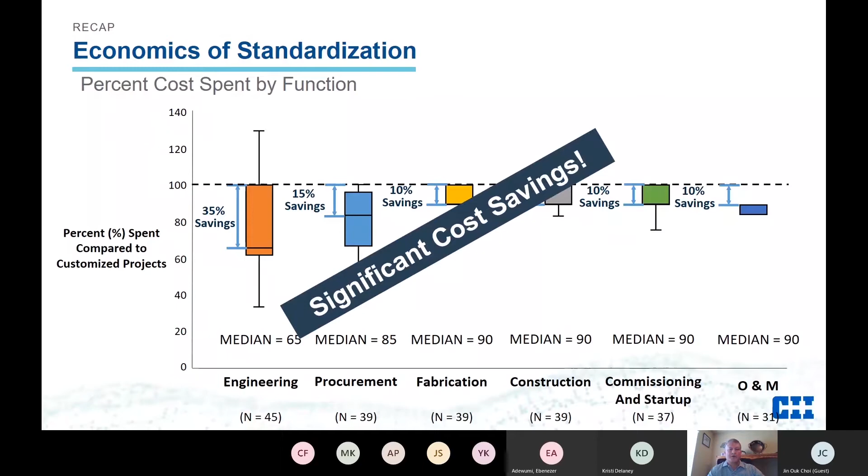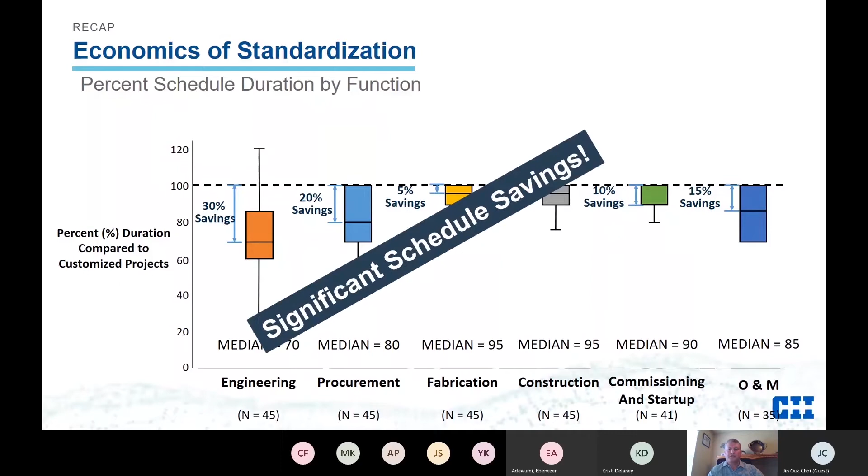Similar to the cost chart, the programs also had savings in schedule across the functions, providing significant overall savings. And again, program projects gained additional duration savings as each project was completed.

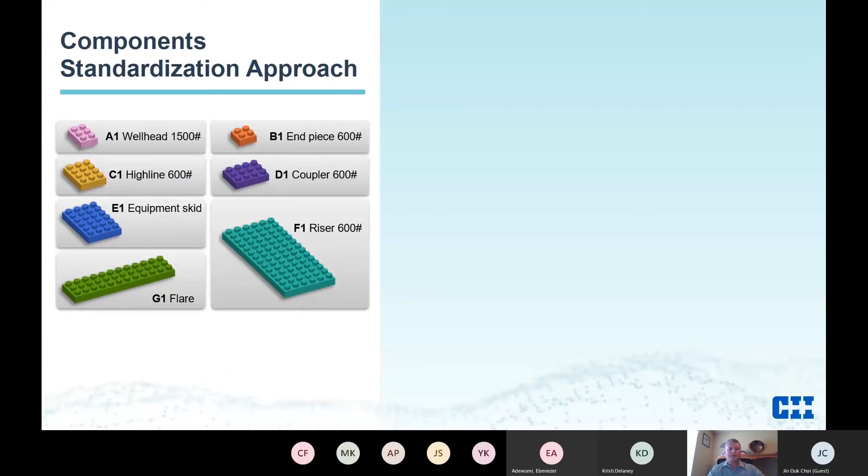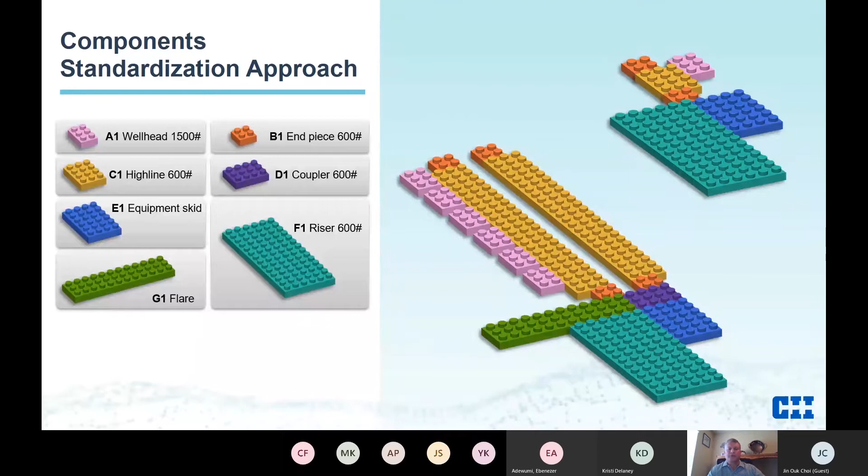Facility standardization does not have to be applied to 100% of the project scope. Last year, we demonstrated how component standardization works from our case project examples. Compressor and pump stations, well pad sites, as well as fractionation and gas plants benefited from strategic standardized modules and standardized equipment packages. Here is an example of a true well pad that shows system level standardization approach.

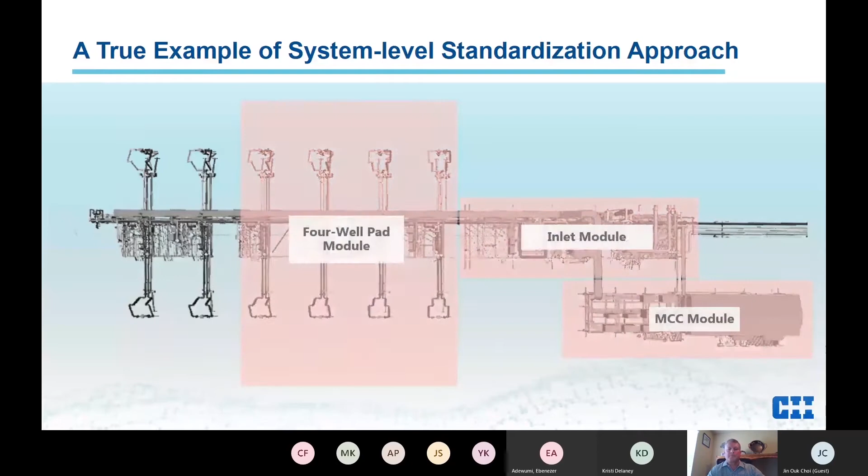So let's recap what is standardization. Standardization is the development and use of consistent design to align project stakeholders, objectives, and scope to capture and optimize schedule, cost, and value. Our team completed a SWOT analysis that summarizes strengths, weaknesses, opportunities, and threats of facility standardization.

Strengths include achieving significant cost savings, increase in efficiency and consistency on projects, designing once and reusing multiple times, and improved agility and increased predictability.

Weaknesses that teams have to manage are the cost and time for the first project, resistance to organizational change, and optimization versus customization.

Opportunities that program projects can enjoy are more predictable resource management and the ability to leverage suppliers and contractors across multiple projects. Threats that project teams have to manage and monitor are the environmental and regulatory criteria, market conditions, and the ever-evolving technology.

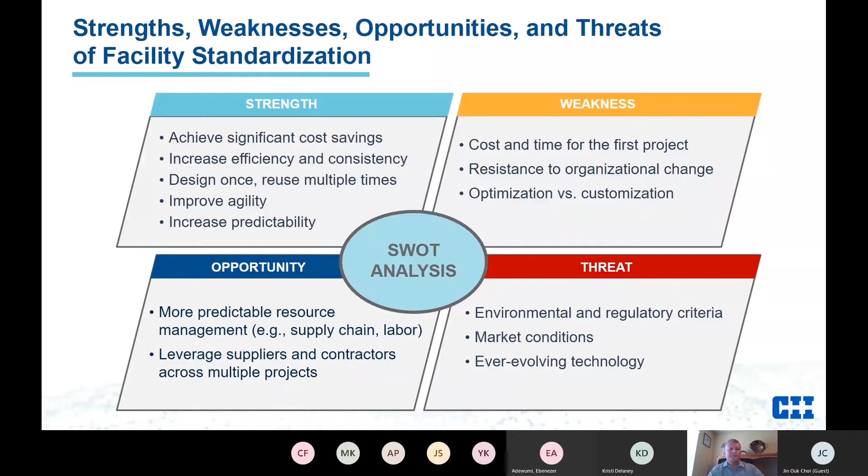So the same as last year, the essential question for our research was: how can higher levels of facility standardization be achieved in the upstream, midstream mining sector? Our phase 3 research hypothesis and objectives all supported this essential question.

In San Diego, our research team presented a pyramid of solution pieces to help companies increase standardization and achieve predictable, fast, agile, cost-effective projects. The pyramid is comprised of 4 levels.

Economics of standardization provides an understanding of the fundamental benefits and trade-offs with facility standardization. Standardization decision-making model, a user-friendly tool that provides an early, high-level, systematic review of key issues in standardization. Its objective is to help practitioners determine the feasibility of standardization by identifying the benefits, business drivers, impediments, and risks.

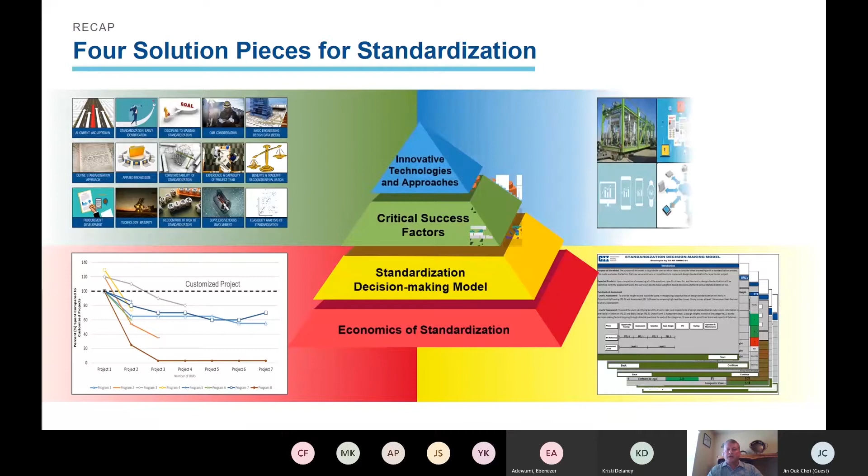Critical success factors and enablers identified 15 critical success factors and enablers along with the responsible parties and the optimal timing of implementation. And last, innovative technologies and approaches revealed innovative future stretch technologies and management practices.

The level of facility standardization in the UMM sector still falls short of the desired criteria. So what is the problem and need?

The capital projects industry needs additional guidance on how to analyze and justify standardization and how to exploit the benefits more effectively. When the industry better understands how to implement facility design standardization and have buy-in on the economic benefits, the industry will be able to achieve higher levels of facility design standardization.

We were very fortunate to have a highly experienced and energized team with over 298 years of combined experience, most of whom have worked multiple standardized projects.

Our research process was very extensive, and we invested nearly 65 hours in face-to-face and virtual meetings, equating to about 700 work hours.

Aligned with the original essential question and problem and need, we added two solution pieces to help companies achieve standardization: business case analysis and work process, added to the pyramid of solution pieces. And we revisited one existing solution piece, critical success factors, to increase standardization.

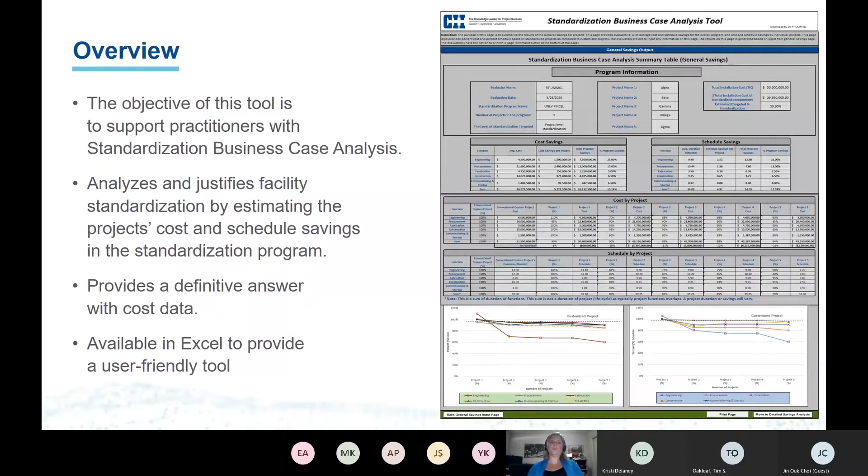The tool is organized into two options. The general savings option is a higher level tool that estimates the cost and schedule savings utilizing percentages. This option will typically be used when information of the program is limited.

Then there's a detailed savings option. It is a tool that utilizes the 13 benefits and 6 trade-offs and allocates costs to those to generate savings. This option will typically be used when information of the program is more available.

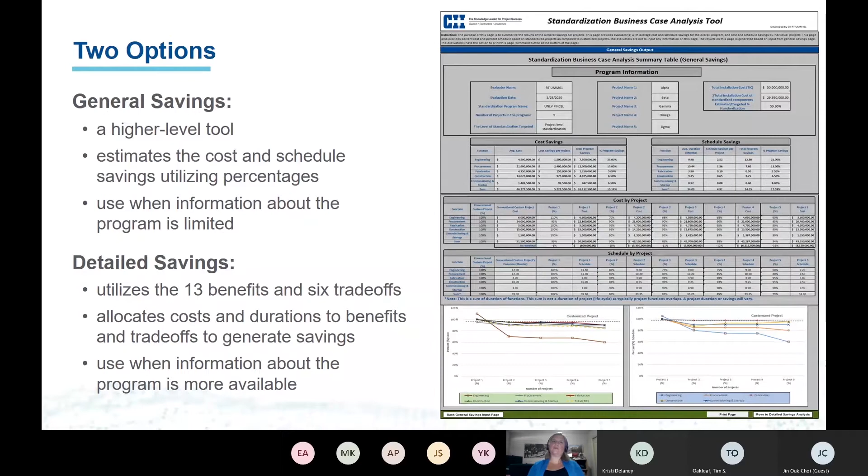The tool begins with an introduction page, which gives the user the tool's background information, instructions on how to use the tool, and the relevant CII publication that should be read in conjunction with this tool.

There is a Program Information tab that asks the users to insert the basic information on the standardization program, the standardized projects, and the level of standardization. This includes the program name, but most importantly, the number of projects in the program.

The user should note that in order for standardization to be feasible, there needs to be more than 2 repeatable projects in the program. The user will also input the level of standardization that program would target. The level of standardization varies and can be at an equipment level, package level, system level, or project level, as defined by the process industry practices.

The next section will ask the user to enter the estimated installed cost of the standardized systems, equipment, or components, and the non-standardized components for one project. The tool will then automatically calculate the total installed cost based on this information.

This will help the user calculate the percent standardization based on the installed cost of the standardized systems, equipment, or components divided by the total installed cost of the project. Understanding the percent standardization will assist users when assigning percentages for the cost and schedule savings in the General Savings tab. Typically, assuming that all of the critical success factors will be successfully implemented, the users can expect a higher percent of standardization can lead to a higher percent of savings.

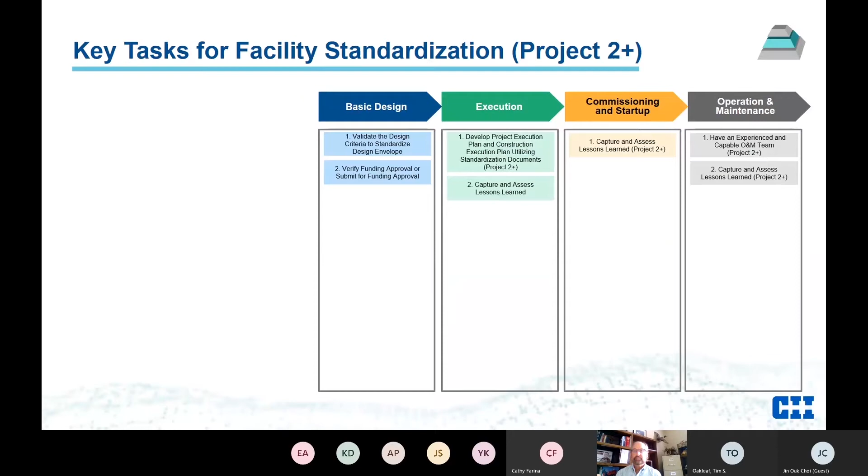The facility standardization optimization chart is a different visual for the work method. Project 1, the top line, utilizes all project phases as described before. It'll be the longest and most expensive project you will see in the program due to the extra market, program research, and other unique activities of Project 1, indicatively shown by the length of the bars.

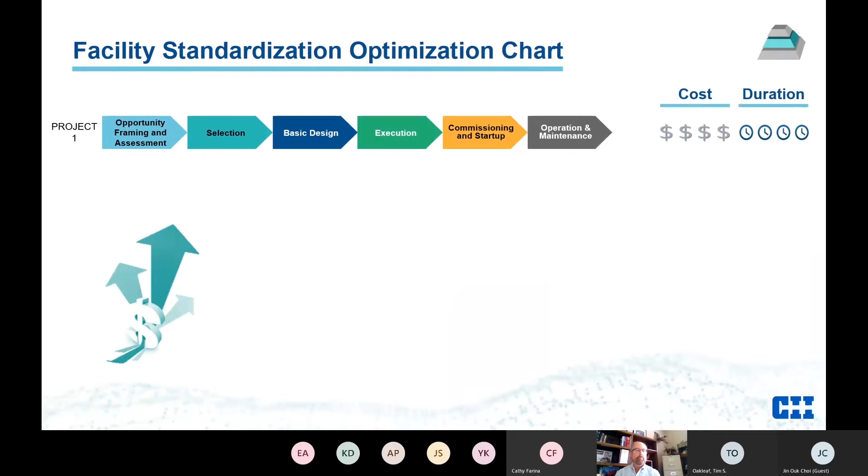All subsequent projects immediately kick off at basic design, and even this phase should be shorter than it was for Project 1. The rest of the phases within a project also decrease in duration, as symbolically noted by the bar length in this chart, as familiarity makes the project steps quicker.

The result is a continuing project cost and schedule reduction, symbolically noted in the far right two columns by the declining dollar and time signs.

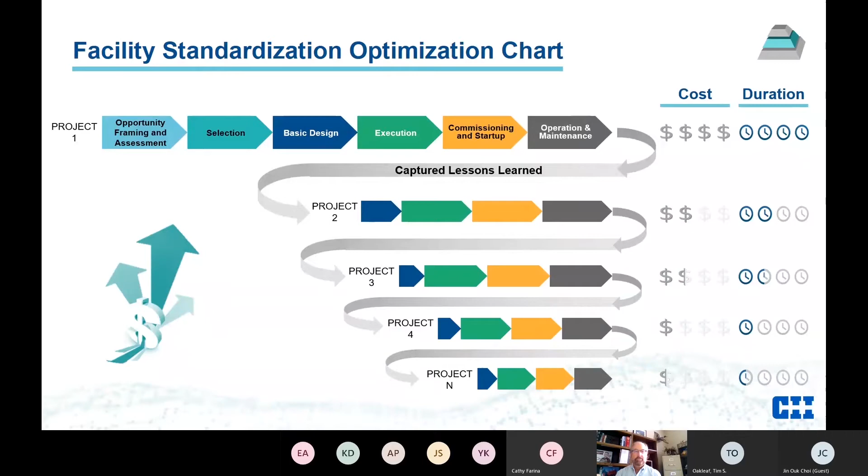At some time in the program, there may be a point where enough lessons are learned and optimization ideas captured that a program adjustment might make sense. Such an adjustment would require a quick opportunity framing and assessment and selection phase analysis to see if an adjustment of the program is worth the changes required.

Summarizing the walkthrough on the previous slides, the top high-value tasks in opportunity framing and assessment are to obtain management buy-in for standardization and develop the standardization plan and work process. These go hand in hand and typically end up being working concurrently.

Selection further defines the approach and develops the basic design engineering data. These are not the only important tasks.

To simplify and summarize the research findings, the teams developed a Cliff's Notes to standardization, describing the key elements for Project 1 and for Projects 2+ for each of the phases in a project. The intent in this slide is to show the summary layout that was developed.

The top includes a brief description of what happened in this phase. This is followed by the specific goals of the phase, the tasks to be addressed or listed, an abbreviated RACI diagram identifies who does what to whom, and finally, a list of deliverables to have been developed upon conclusion of this phase of the project.

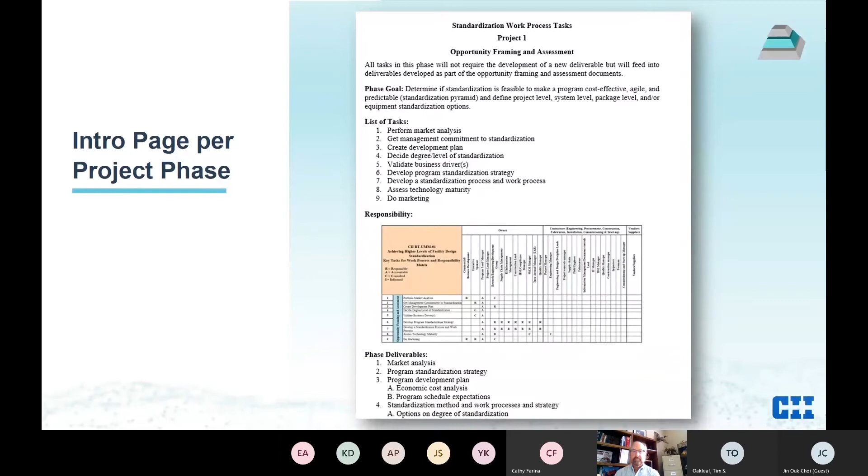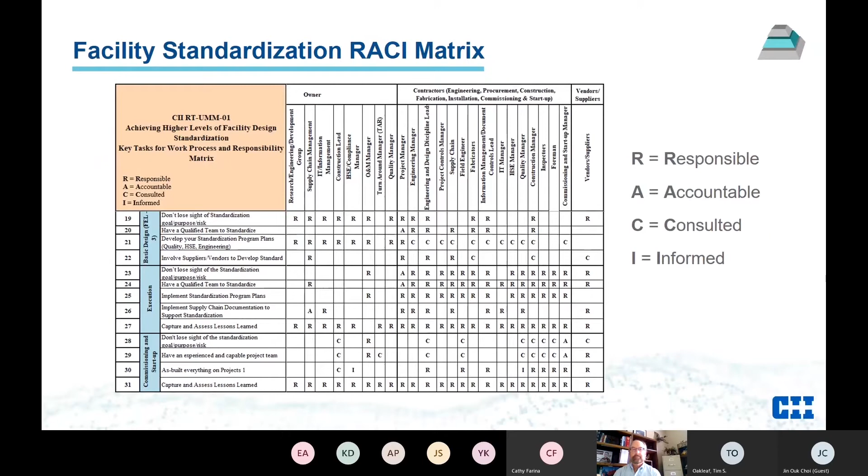These tables show the key accountable or responsible players for facility standardization. The orange boxes highlight those players: program project leads or managers from the owner, and project engineering construction managers from the contractor.

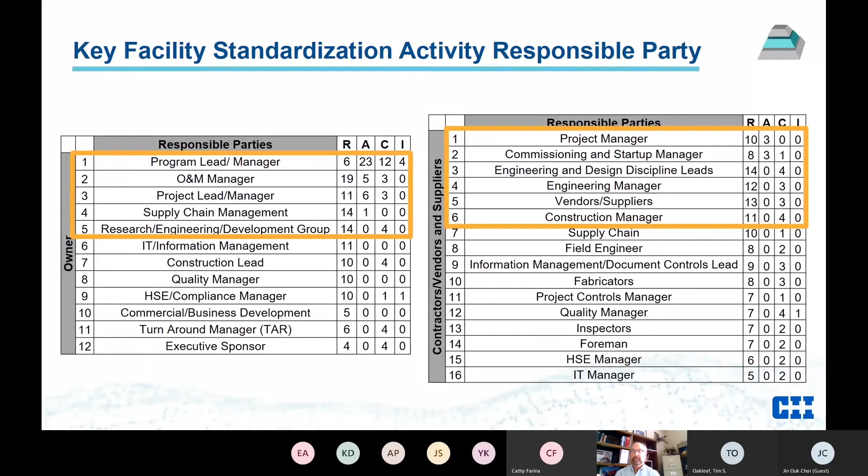This slide shows a tool developed to provide a quick check on how well your standardization program is doing. Please watch this short video on how the tool can score your current efforts in terms of potential standardization success.

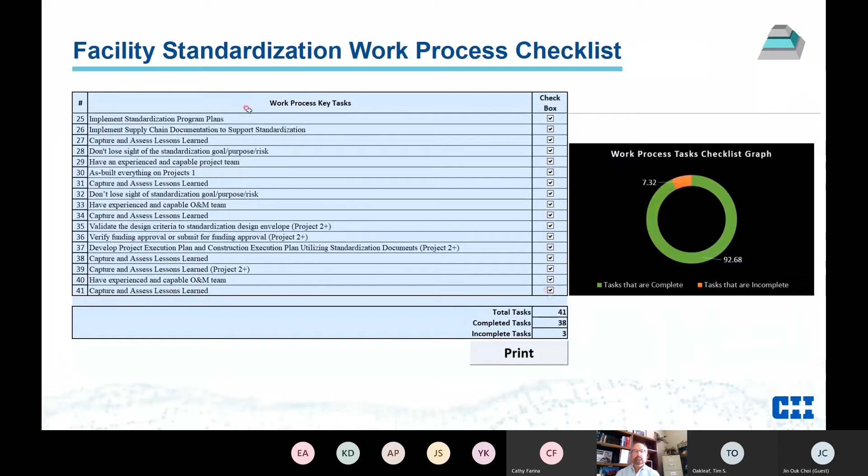CII's artificial intelligence emphasis on digital thinking has become very important in standardization. Along with standardizing and duplicating the engineering, design, and procurement cycles already mentioned, there is also a need to quickly duplicate all the associated engineering, procurement, specification, and testing documents for each subsequent project. While some of these changes can be generalized by developing documents that address the entire program, there are always documents that require specific project adjustments.

Early identification of documents that need project tweaking can be handled through data-centric artificial intelligence methods. With proper forethought, the entire documentation side of the standardized model can be designed to permit automated updates of necessary tweaks, providing specific tags, dates, references, etc. The following short animation of a recent standardized job runs through examples of what was identified and what the typical updates look like.

Understand that even if one does not catch all of the specific project modifications, it is still worthwhile and will save hours over traditional conventional document handling and approval.

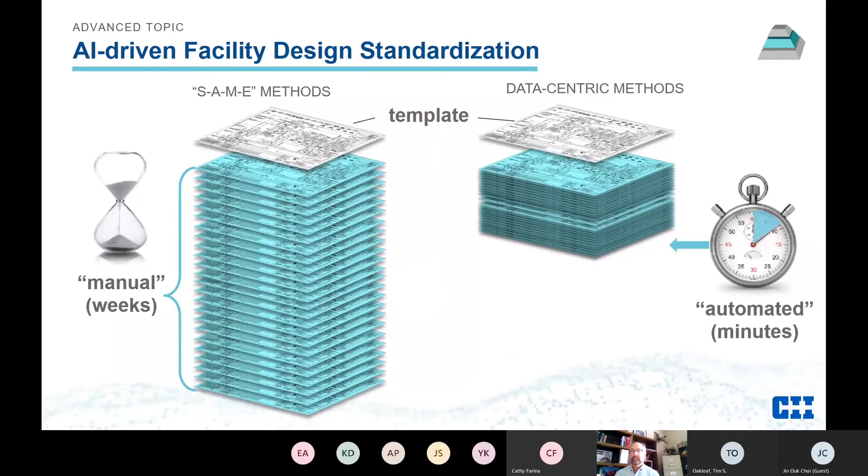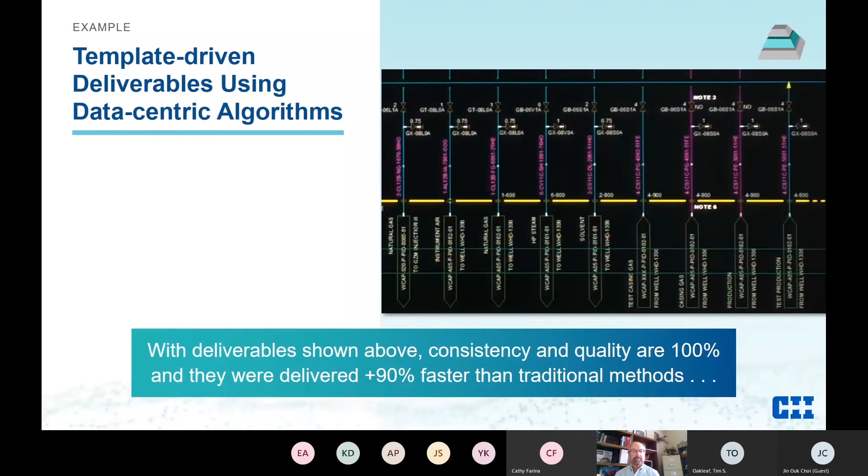This short video shows an example of template-driven deliverables using data-centric algorithms. With proper setup, the quality can be 100% with delivery 90% faster than traditional document handling methods. This means faster and higher quality documentation to equipment vendors, construction teams at site, and ultimately operations and maintenance.

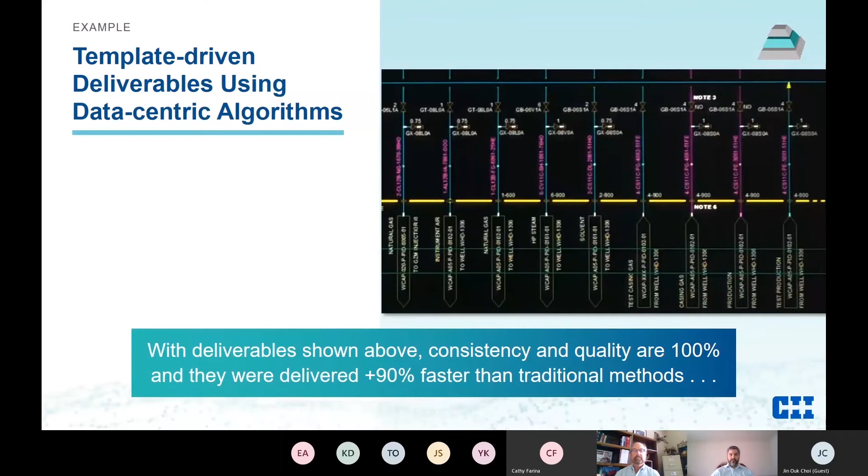And now I'd like to introduce Annabelle, who will go into more detail on the critical success factors I previously touched on. Thank you, Michael.

Now I would like to talk about the third solution piece: standardization critical success factors. Last year, our team identified 15 critical success factors, or CSF, and their associated enablers. We found that the industry needs a better understanding of CSF, specifically in relation to their accomplishment status and relative significance, to ultimately drive better project performance. As a result, the primary purpose of this study was to provide recommendations for better project performance by identifying correlations between CSF and project performance through actual projects.

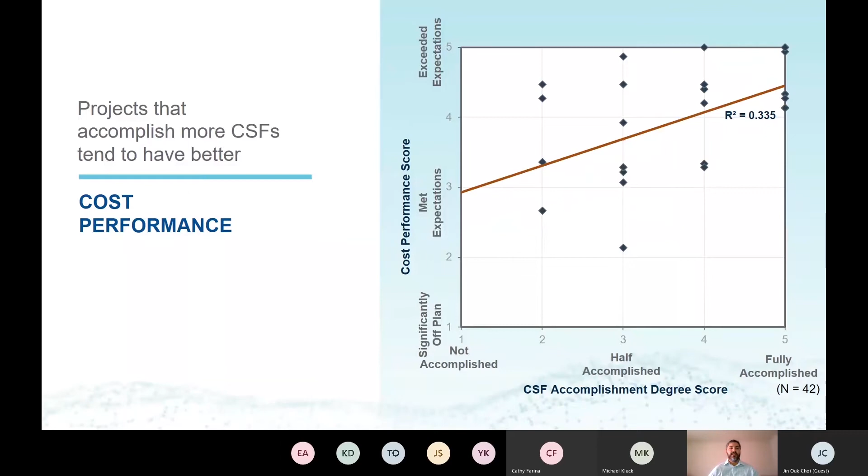The second graph shows the same positive correlation between CSF accomplishment degree and cost performance. In general, projects that accomplish more CSFs tend to have better cost performance.

And finally, we also notice the same correlation between the CSF accomplishment degree and the change management performance. In summary, this will improve your project predictability.

We also wanted to know which CSFs are accomplished most commonly and which remain elusive or difficult to achieve. The lowest CSFs accomplished are CSF number 8, constructability of standardization, and CSF 15, feasibility analysis of standardization. The industry may put more effort into accomplishing these CSFs in order to achieve higher level of project performance.

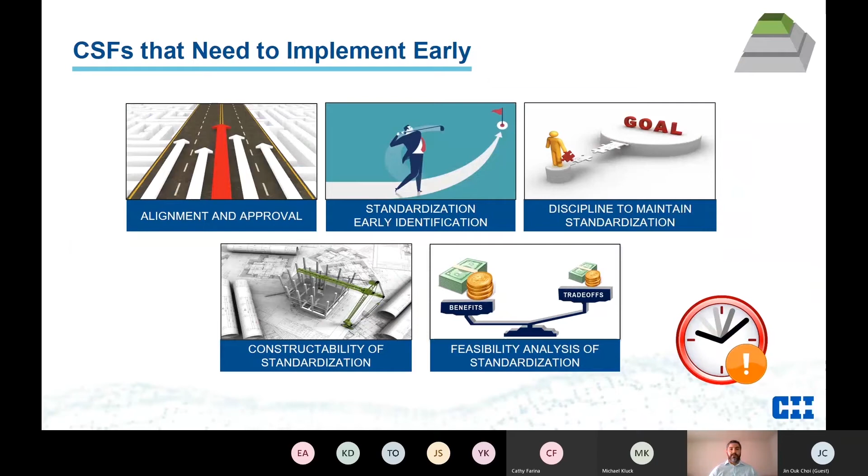We also recognize that timing is important in order to drive project success. We recommend that these 5 CSFs need to be implemented early: alignment and approval, standardization early identification, discipline to maintain standardization, constructability of standardization, and finally, feasibility analysis of standardization.

Our team also investigated the combinatorial effect of CSFs on cost and schedule performance. We used the information of actual cases to obtain a conceptual model of cost and schedule successes. Recipes for cost and schedule successes for facility standardization are accomplishing these CSFs.

CSF number 3, discipline to maintain standardization. CSF number 4, O&M consideration. CSF number 6, define the standardization approach. CSF number 7, applied knowledge. Similarly, number 8, constructability of standardization. And the last 3 are CSF number 10, benefits and trade-off, recognition of risk of standardization, and finally, supplier and vendor involvement.

This slide shows a tool developed to provide a quick check on how well your standardization program is doing. Please watch a short 5-second video on how this tool can score your current efforts in terms of potential standardization success. Now, to close this out, let me introduce Jennifer.

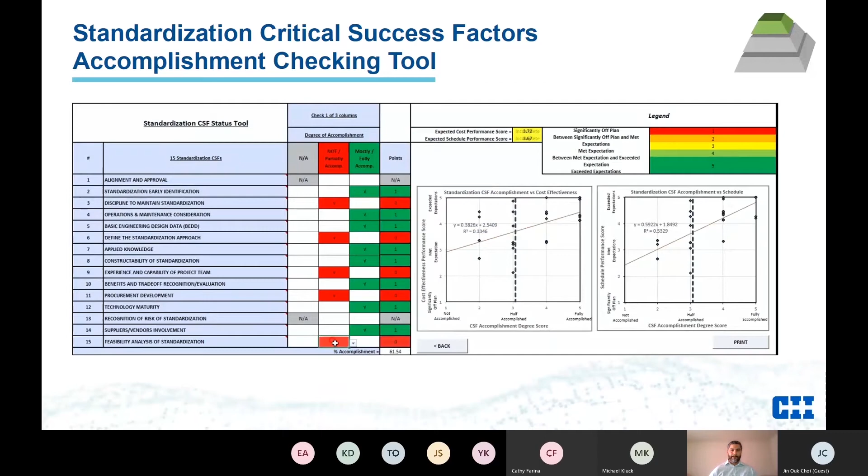As we are wrapping up our presentation, I want to thank each of our presenters: Tim with his introduction to our efforts, Cathy with the business case analysis model, Michael with the work process, and Annabelle with more on the critical success factors.

Each of these solution pieces contributes to our pyramid of solutions aiming to support industry in increased use of standardization, thereby increasing predictability, agility, and cost effectiveness.

To enable your use of the pyramid of solution pieces, we are providing you with several user-friendly tools to help you achieve higher levels of facility standardization. The tools are the decision-making model, critical success factors and enablers, innovative technologies and approaches, the work process and guidebook, the work process checklist,

the business case analysis model and tool, and finally, the CSF's accomplishment checking tool.

Now that you are all excited about standardization, in order to maximize standardization and therefore the benefits, there are several things that must happen that we can't do for you, but that you can do for yourself.

First, industry leaders must act. Industry leaders, including yourselves, need to understand that there is a need to shift the current mindset that everything needs to be customized in order to optimize the outcome, but to understand that optimization in predictability, reliability, and cost effectiveness may come from standardization.